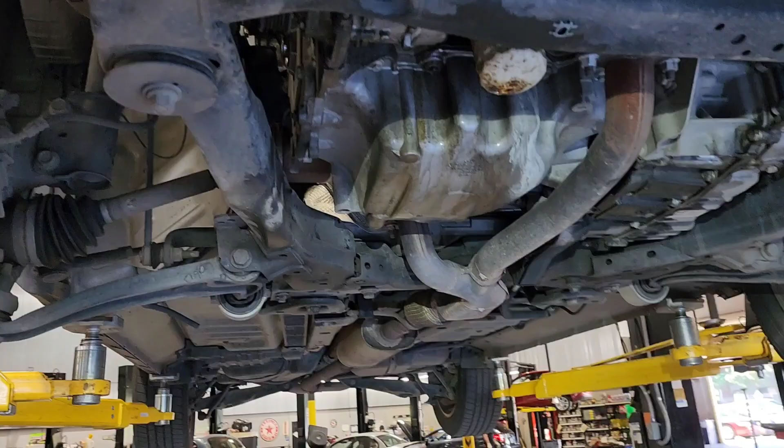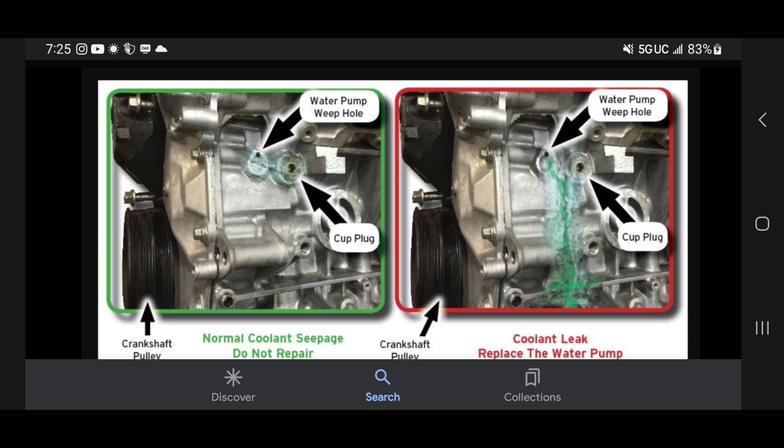So on these 3.5s, how do you know that your water pump is leaking? Well, you'll have coolant leaking right down through here, down the oil pan this way. There's a weep hole in the block up there. I'm not taking the alternator out so I can't really show you, but there is a weep hole right up through there. In the picture on the right, that shows the weep hole. If coolant is coming out of that hole, replace your water pump. That's manufactured through the block, so when the water pump fails, the coolant runs out the block and comes out externally here to show you there's a leak.

The reason it does that is because the water pump itself is inside of the timing cover. If the water pump fails and there was no weep hole, the coolant would just go into the oil. This way you can at least catch it before it completely fails and dumps into the crankcase. Then your timing is messed up, and then you need an engine.

To replace this water pump, we need to remove the timing cover. And to remove the timing cover, we need to lock the cams in place. The cams are under the valve covers. To remove the valve covers, we need to remove the intake plenum. So we're gonna go ahead and get the plenum off, and then I'll show you what we're gonna do for the valve covers. First step is to remove the intake air tube, plenum, and valve covers.

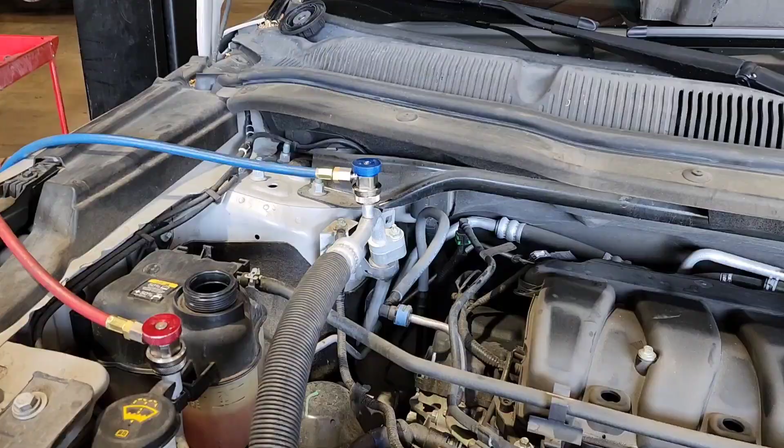I'm disconnecting the AC so I can get these lines out of the way. I can unbolt it here, and I'm gonna unbolt it down there to get this out of the way of the alternator and the timing cover so I'm not fighting it.

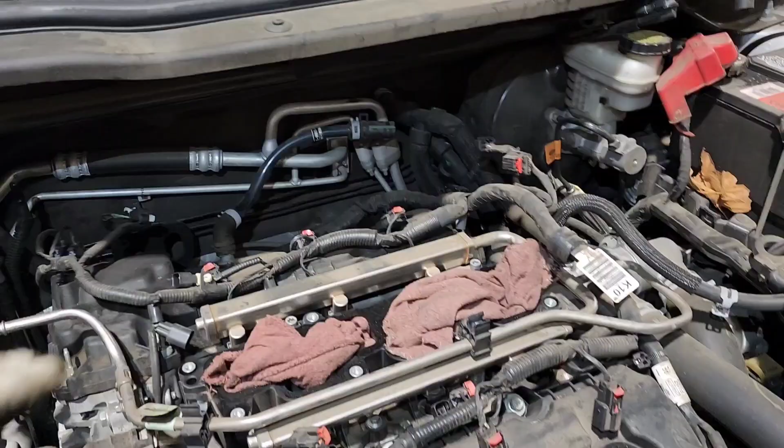The plenum is pretty simple. You're just gonna have a few bolts right here across the middle. This goes in between the plenum and the throttle body. You've got two connectors here, they're gonna come off and just stay there. You've got a connector back here, you got to pop a clip, get that out, and there's one bracket right there with an 8mm. Take those out, and the plenum comes right off. You leave the throttle body connected.

Go ahead and plug up your intake holes here and take an air nozzle, blow all this off the best you can.

From here, you're going to be disconnecting all your coils, popping your coils out. If you turn your coils all the way that way, they'll hit right here and pop up. You got to disconnect all this. We've got a ground here, and a harness over here we got to disconnect, so we got to get that out of the way. You've got your fuel line right there, get that out of the way too. And it's going to be a bunch of connectors.

Then these valve covers are going to be a pain to get off because they're plastic, so you've got a lot of clips holding them in place. Usually these things don't last super long, so hopefully your clips are still good.

So I'm going to finish getting all of this off. You've got a connector here, and here's the connector I was thinking of right here, it comes from the valley and plugs in right there. Got to disconnect that.

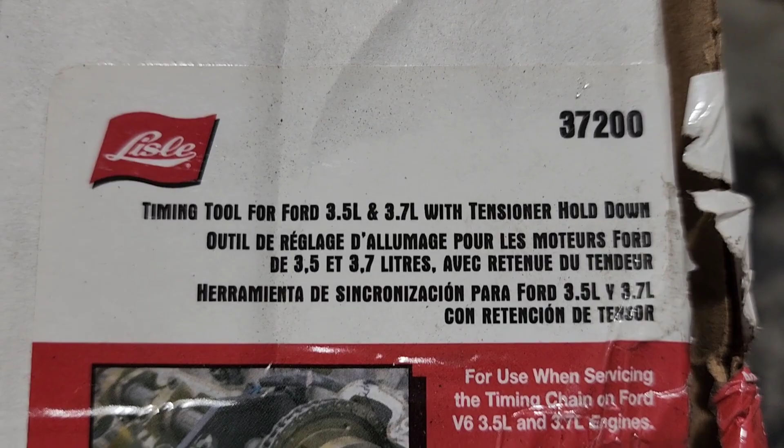So you're going to need a cam holding tool like this. This is from Lisle. This will lock the cams in place and keep them there so the engine timing does not move, and they look like this.

Before you put the cam holding tools in, you've got to take off these oil supply tubes that feed the variable valve timing. Don't forget to put these back on. I put them in the valve cover because on the last one I did, I almost forgot to put them back in the engine.

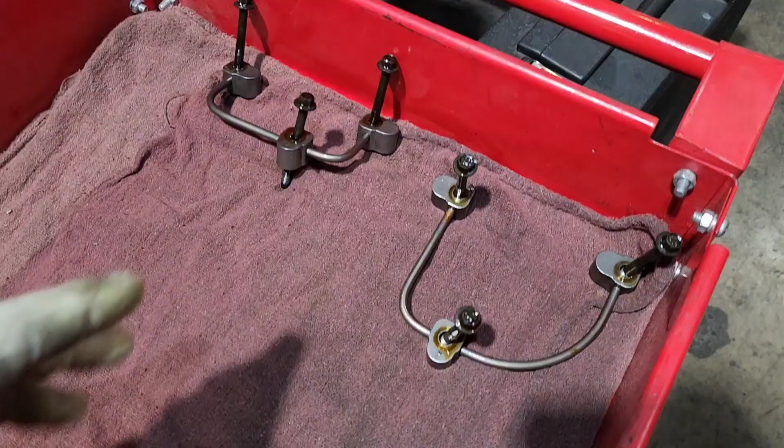You see these oil supply tubes, they're different, so you can't mix them up. The bigger one is for the front head. Now the cam holding tools are going to slip on right there at the front of the cams, and both tools should fit on each head. If they don't slide on both cams, then your timing is incorrect.

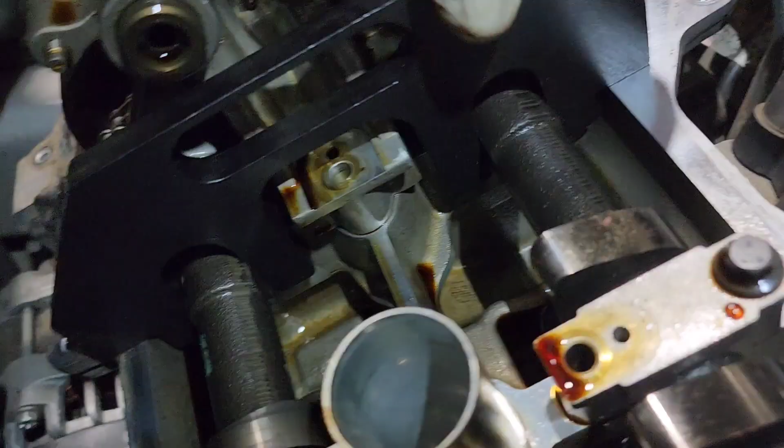Before you lock your cams in, you need to turn your cams over until that dot is aimed up. Both cams have that dot right there. If that's not aimed up, then your engine is 180 off. Turn your timing until the dots are at the top and then lock your cams in place.

You'll be able to see on the back one, the tool doesn't drop all the way down. You're going to see a little bit of a gap right there between the tool and the cylinder head. So that's what I was talking about - it needs to touch the cylinder head. That means the tool hasn't dropped all the way down and the cams aren't completely lined up.

So you're going to see it drop. It just dropped right there. All I did was turn the crank just a little bit, a tiny bit. I just tapped it, and then the tool fell in place. Now you can see both sides of each tool is touching the cylinder head.

When I first set the tools up, the dots weren't at the top. The engine was 180 off. Then when I looked at the timing, saw the dots weren't at the top, rolled it until they were at the top. Okay, so that dot is on the intake cam only. The exhaust cam is only connected to the intake cam by a separate timing chain. So that's the intake cam.

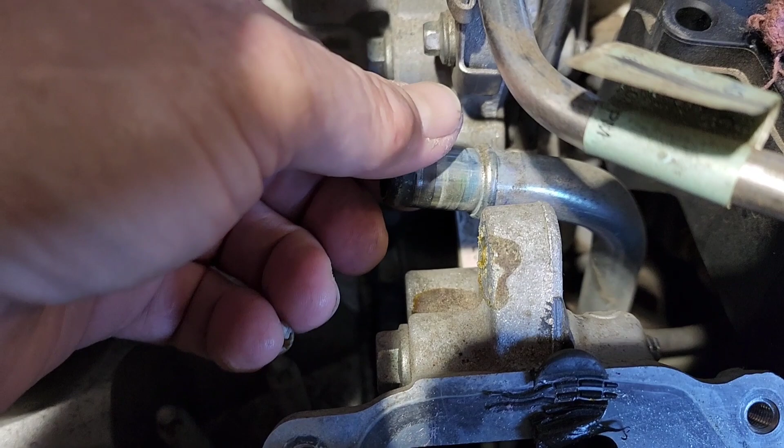Before you can get the motor mount out, you got to take the degas bottle out. You got a hose right here with a quick connect that's going to go here. So what I like to do is, after I release it and pull the hose off, I take the quick connect off of the hard line and I actually put it in the hose. One, it keeps the O-ring and all the internals in place, and two, when it clicks in, you know the bottle is in, the line's in, and it's connected.

So to take the balancer off, I just use a Chrysler balancer remover tool right here like this. I got it set up. Let me see if I can do this one-handed. My tool takes a 24 millimeter. There you go, and it's off.

Looks like this. It's got jaws like this. The centering bolt has a hole in it, and you have different length rods. Use the shortest rod, and it came right out.

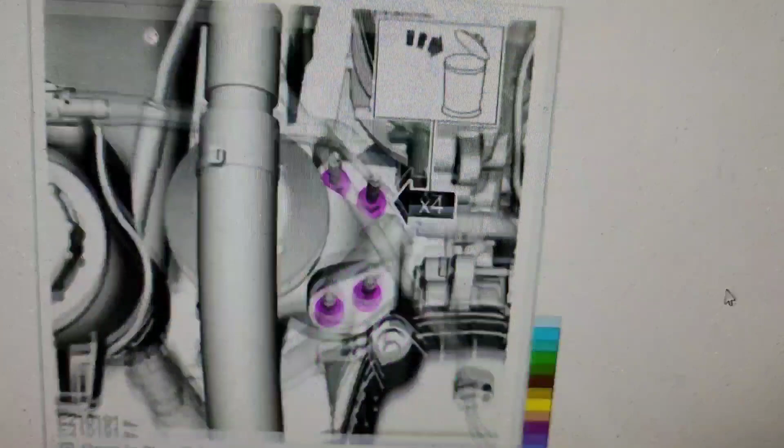The last step before we mess with the tensioner, before the timing cover, is we have to take the tensioner off and then remove the two mounting fasteners to the alternator, and then we're just going to roll the alternator out of the way. We're not going to disconnect it, we're just going to leave it in there. Then I support the oil pan with a jack or a jack stand. And then from there, you got to take the engine mount out.

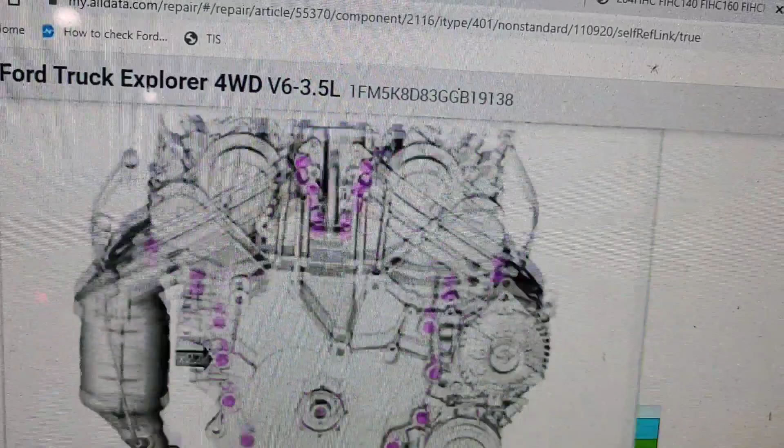Let me show you - this is what the bolts look like for the timing cover. We got to take all those out. So this is why I went ahead and locked the cams in earlier, just so I don't forget - you don't want to mess up and forget. So that is the bolts right there.

So from under the vehicle, you'll see we have the engine mount, we have several big 15 millimeter bolts. There's one there, and there's one there, and another one right in there. So we've got to get this tensioner off and get the generator off, and then what I do is I take out as many bolts in the timing cover as I can from down here. Once I've dropped it down, I don't want to have to climb under the vehicle and take out many bolts.

The main thing is you don't touch those 15s until the engine is sitting on a jack stand or a jack, and you have the engine mount out. Let's go ahead and get this tensioner off and the alternator.

Before you mess with the alternator, go ahead and take the AC line off down there from the compressor. You can get to it right down through here with a long extension, and reach your hand down there to get the line out of the way. I said before you could probably leave it in, and I know people who have done it with it in, but it's easier to just take it out.

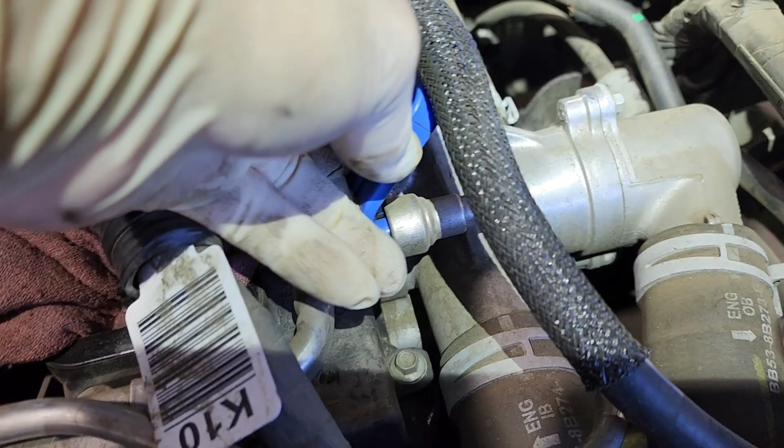Next up, we got to remove this AC line right here. It's going to be an 8 milli, and you're going to use a Lisle Tools AC line disconnect. Pop this line off and cap it.

Then your alternator is just going to maneuver out of the way. You can maneuver the alternator out of the way with the AC line in there. I'm sure you can, but it wasn't worth fighting it, so I went ahead and just took the AC line out.

Oh, don't forget to disconnect your battery. That was obvious, before you go moving your alternator. Always disconnect your battery before you move your alternator.

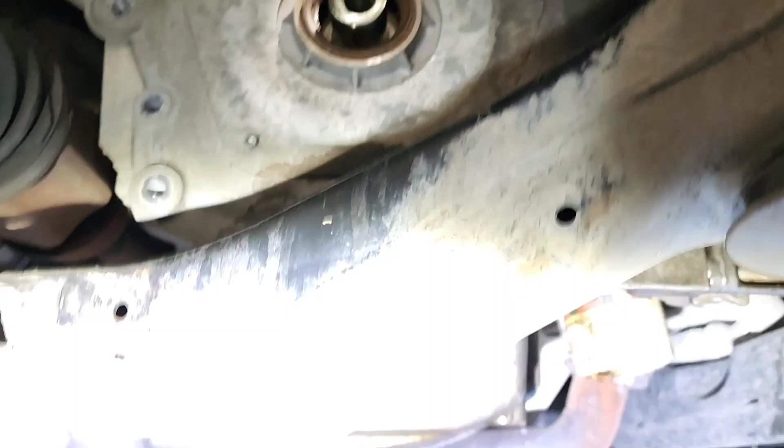With it in the air right here, what you're going to want to do is take out all the perimeter bolts from underneath, all the way up there, all the way around. If you have 16 bolts, you got them all. Now we only have the 3 engine mount bolts and the bolts up top.

I'll show you those. So now that we have all of this off, I'm going to drop it down and support it right here with a block of wood and either a jack or a jack stand, however you want to do it. I like to use a jack stand.

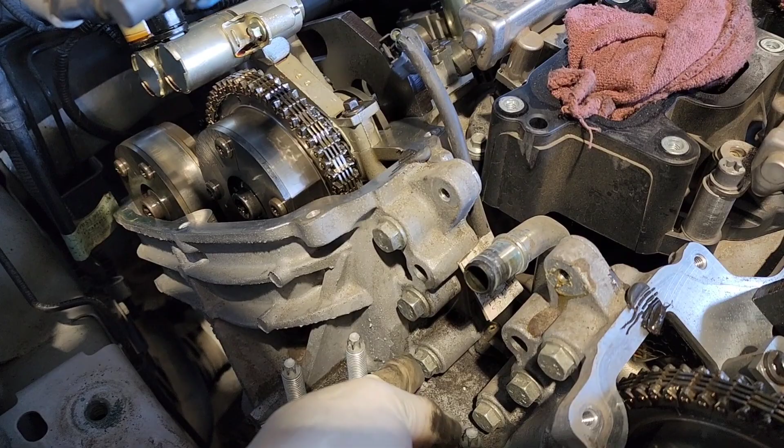Once you've got the engine supported on the jack stand, you're going to go ahead and take this engine mount out right here. Just set that right there for a second. We have 6 more 13mm bolts right here, and then we have the 3 15s that go through here.

Now you're probably going to have to move the engine up and down, or move the car up and down, however you want to do it, to get the bolts out of the cover because they're going to be long, and then we're going to pop this cover off.

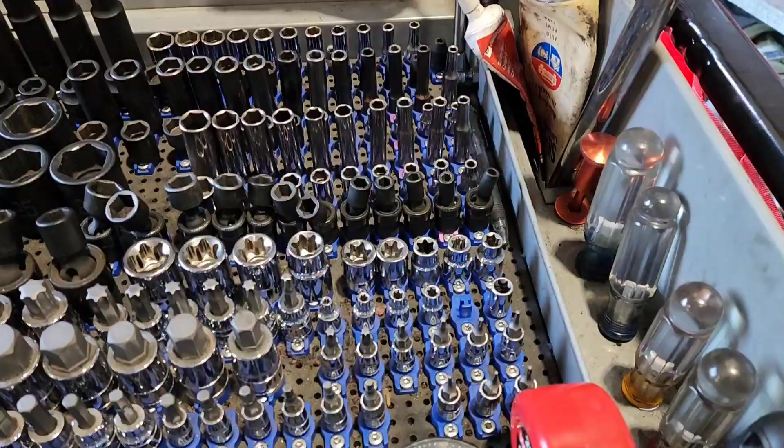You're going to have to come over to your cart right here, and I go over to my Carbine Tools E-Torx section here. I got the E8. You're going to need to remove this stud right here and this stud right here to get these bolts out, because the bolts hit it. You don't need to take out the outside ones, just these 2 here.

And then you can get these bolts out. The 6 bolts at the top of the timing cover are longer. Then you're going to have your 3 15s, and they're going to be different lengths.

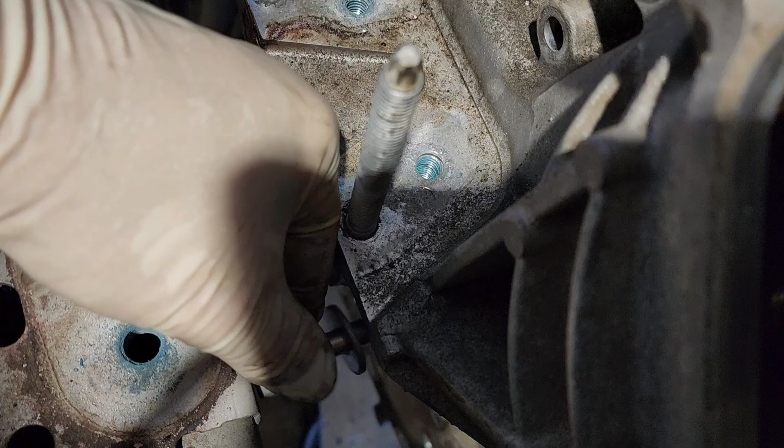These 2 come out the way the engine sits to get the mount out. But this last bolt doesn't come out, it hits. So what we have to do is either drop the car down or raise the engine up so we have clearance to get that bolt out right there.

I almost forgot about this. There's an 8mm bolt at the back of the timing cover. Don't forget to take that out.

So remember, when you pull your timing cover out, you have to be able to put it back in. It's going to have silicone all around the edges. So remember, keep the engine how you had it, and even maybe dry fit your timing cover before you actually try to put it in, because you don't want to bump that silicone and have to do this again.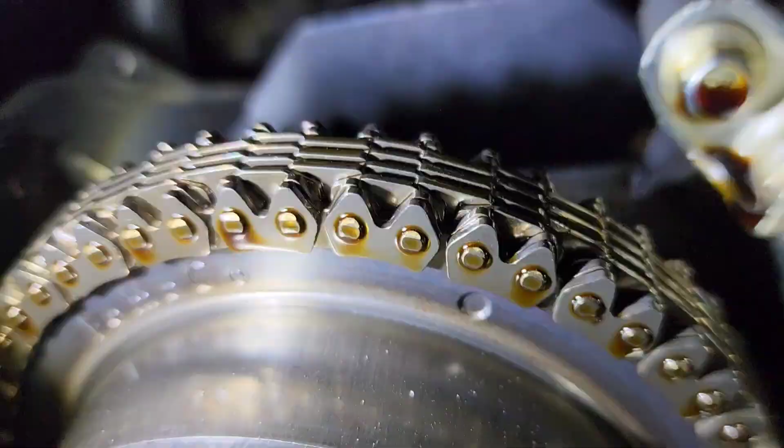So the next thing you're going to do, now that we've got the cover off, you want to come right here. What I do is I just go where this dot is, and I mark the camshaft sprocket and the chain. Do the same thing here, and I do the same thing on the crank.

Your colored links are not going to line up. You only have to do the intake cams, because that's the only one that the chain hooks to. The two cams are held together by a secondary chain. We're not going to be touching that.

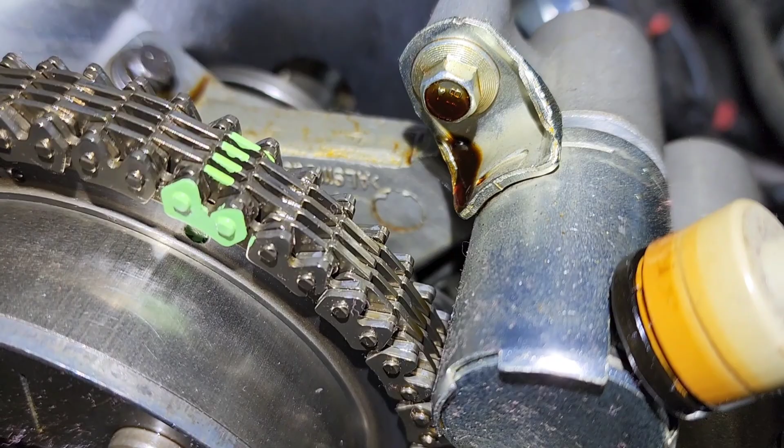So here's what it's going to look like before you take this apart. You're going to mark it like that. Make sure it's very distinct how you mark it. Remember, these timing chains have oil, so sometimes oil drips down.

So here's what we're after right there, that water pump. Yeah, it's timing chain driven inside the timing cover. So you're gonna do the same thing on the crank. What I do when the dot is in the middle, I mark both the links on both sides like that.

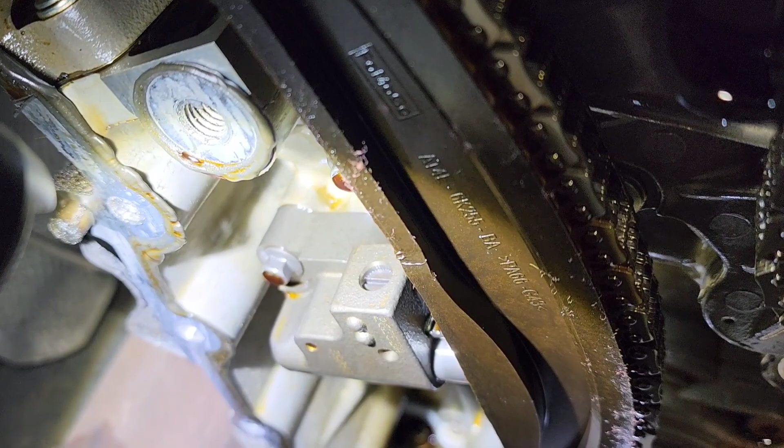We're going to slide this guide out. It's on a pivot right here, and it sits on the tensioner. So you're going to slide this guide out, and then we're going to unbolt this guide right here. So tensioner first, slip the slipper out. You call this one the slipper, and then remove the fixed guide. Well, camshaft solenoids first.

Now I don't take the phasers out, and you can get the chain out with the phasers on. So what you do is, after you have all this off, you slip it off the crank. You just feed the chain this way, and you're able to get it off of the water pump, okay?

And then you're just gonna take this, bring it up like that. All right, we're gonna take out this guide in the front here, and now this guide, the bolt is back here up under, if I can let you see it here. The bolt is way up under there. So I use a wrench, I loosen this bolt up until I can slide this guide out almost up against the sprocket, and then this guide will rotate around like this and allow us—see right here, it's too close to the water pump, you can't get the water pump out. That's why this has to come off.

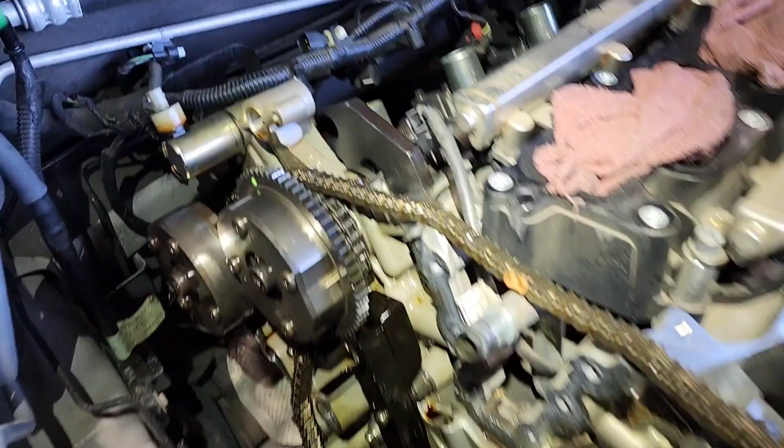To get this out, technically you have to take this phaser out. I don't do that. Now what I do is I come from underneath here with a combination wrench with a box end, and I break it loose. And now with a little ignition wrench like this, you can put it in here and just turn and get this bolt to loosen up. Now, I think that might be enough. We're almost up against the sprocket there.

So now I'm going to pop these 8mm bolts off this water pump. It should be 8 bolts, and I leave the top bolt partially in. So I'm going to try to do this one-handed.

There's a little spot right there to stick a screwdriver in. So you stick the screwdriver in and you break it loose. I'm trying to hold the camera, hold the screwdriver, break it loose. It's not going to work, but you just want to make sure you have all your bolts out and just go around, break it loose, and then make sure that guide is all the way up against the phaser.

Just to show you, you can take this water pump out without taking the guide out. You can see I have the guide up against the sprocket, and I'm going to rotate the water pump out with the guide in place.

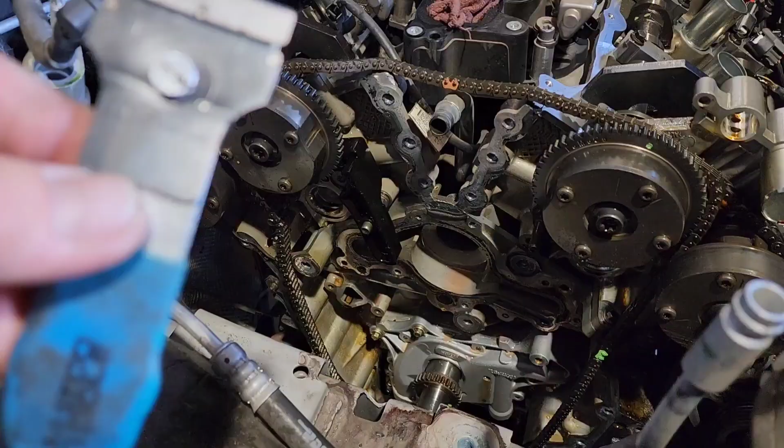Next step is to clean all the silicone off and clean the water pump surface. I like to use a little razor blade scraper like this. It's from Matco, pretty cheap. And then you're going to get little squares of Scotch-Brite pad. Just keep it soaked in brake clean, and as long as it's soaked in brake clean, it'll clean great.

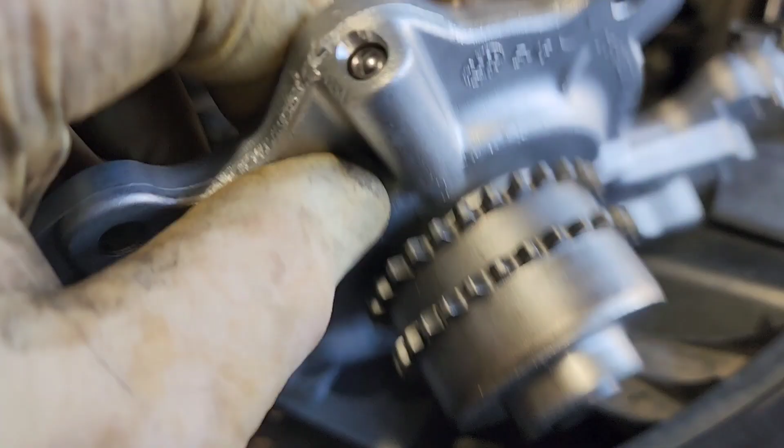So this is what the weep hole would look like if you had an external water pump. It would come out to like a little plug, and when coolant came out, you know that it had failed. Well, since this one's inside the timing cover, there is your weep hole. So when your water pump fails, it pushes coolant out of that hole, which then pushes coolant out of that hole right there in between those 2 bolt holes. It pushes it out of there, and then it comes out of the block. And that's how you know it failed.

And like I said before, this is how internal water pumps are if you have one inside of your timing cover.

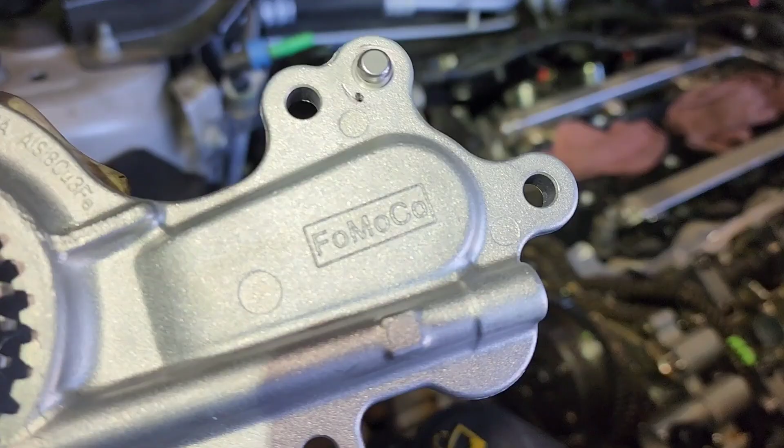So once you get everything cleaned up, I take the bottom of the chain and wrap it up here along the top just to get it out of the way. So you're going to put your water pump on and torque it to 89 inch-pounds plus 45 degrees. So here's what we'll be putting in, a Ford Motor Company water pump. If you're putting in a Ford one, it will already have the gasket pressed in place.

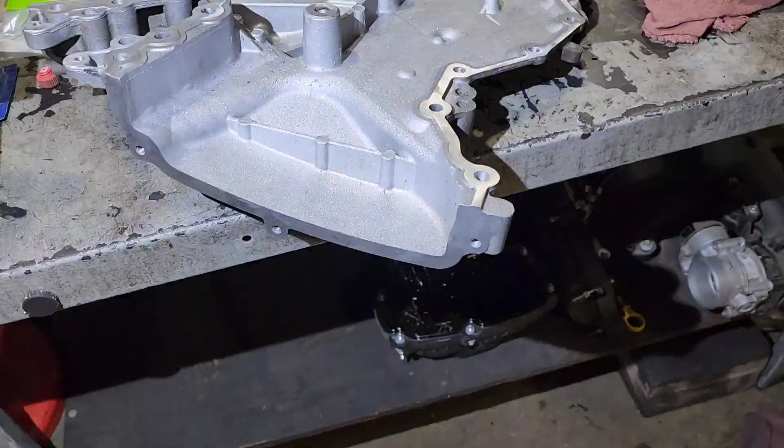While you're waiting, go ahead and get your timing cover clean so it has time to sit. Just spray it off, get everything clean. Got the new crank seal installed here. Don't forget to clean your bolt surfaces there.

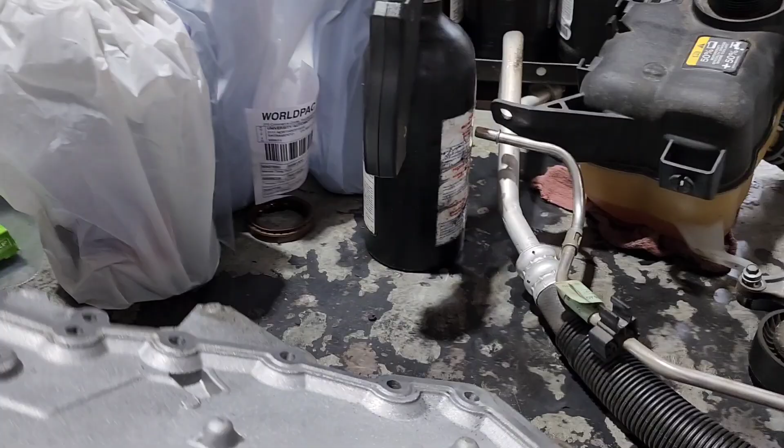From here, we're going to go ahead and lay the chain back down, put it kind of underneath the pipe, get it all back strung. Then we're gonna reconnect this guide, then put the guide on the other side. Get both of those guides in.

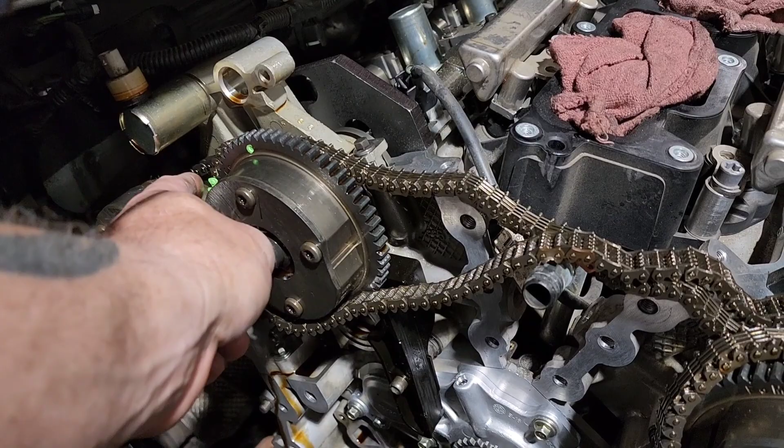You're going to go ahead and get all your timing marks lined up. Get that one set right there, get that one set right there, and get it lined up on the crank. Once all of your marks are in place and the chain is strung, we're going to go ahead and bolt up the fixed guide on the front.

Now with your timing marks all lined up and your cams locked in, your timing chain and your cams should not move. Once you have all that done, you're going to slide the slipper in. Once you've got the front guide bolted in and your slipper slipped on and your timing is all correct, we need to bolt the tensioner in. But before we bolt the tensioner in, you have to depress it and get it locked in place if you're not replacing it.

Now, before you run your chain, what I like to do is clean all of the sealing surfaces for the timing cover while the chain is out of the way so I have more room. When you go to clean this, you're going to have two areas on the back. Right there is going to be a little puddle of oil, you want to sop that up so it doesn't keep running out. Then there's the section right above it, below the exhaust cam sprocket, so you want to clean that out too, since it'll just keep running down the timing cover.

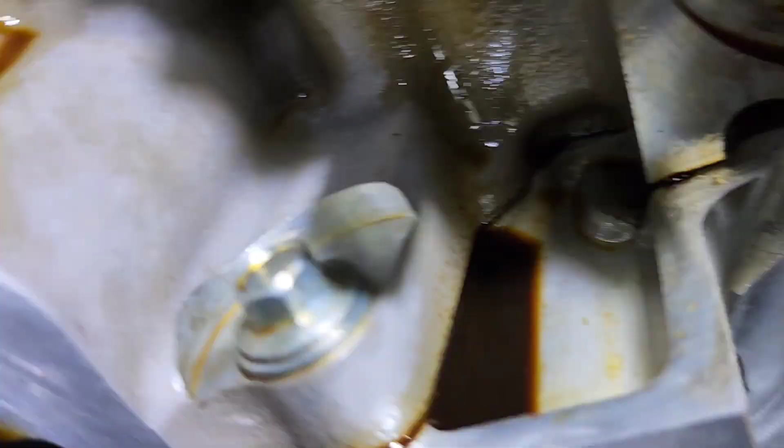Now I like to stick a rag up in there until I'm ready to put the timing cover in, so it soaks up all the oil. And then this section right here by the head gasket, that's just going to keep leaking out oil and cause problems.

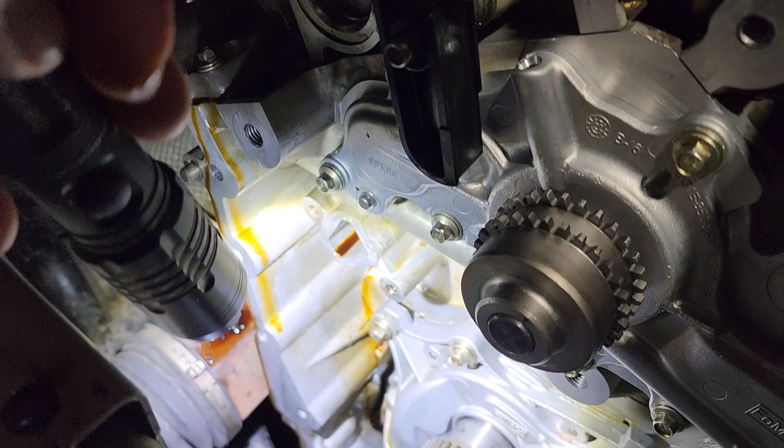Now, whenever you get ready to run your silicone, there's a seam at the head gasket to block, and then there's a seam where the oil pan meets the block. You want to put a dab of silicone on each of those four points before you put the timing cover on.

So I had this happen to me, and someone asked me about it doing this job. What happened is they had this timing mark lined up, but it was halfway to the tooth, and they didn't know what to do because the cams were locked in. Everything should be like it is, well, the cams are locked in, but there is a slight amount of movement.

So what I did was, on this one here, the mark was here on my chain. So all I did was take a wrench right here and move this cam that way while pushing down on the chain, and then the chain dropped in place.

Now you'll notice that down below, that mark is not going to line up down there. Remember, we have to put this guide in here, and then our marks will line up down below. So now that I've got the chain on the top, and it's on the sprocket, below the sprocket, we need to put this guide in. Actually, put this guide in first, don't forget this guide.

As you can see right here, the crank is off slightly, it's turned clockwise just a little bit. So what we're gonna do is grab the crank and turn it back until the teeth line up with the mark.

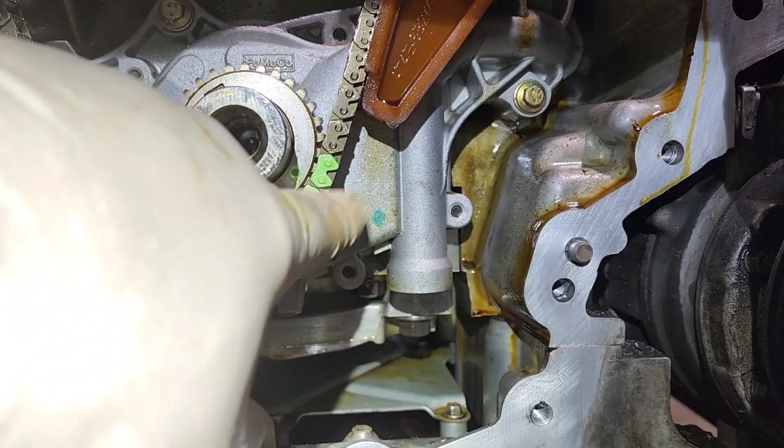Because we're a half a tooth off right now, just moving the crank will line up the chain. The top chains are lined up with the mark, so now we have to get this lined up so we can get the tensioner in. This fixed guide is 89 inch-pounds. All I did was grab the crank with some pliers and turn it back just a tiny bit, and the chain dropped right onto the sprocket.

So we got to put the slipper in here. I'm going to try to do this one-handed. It's going to be pretty hard because the chain has to lift up and go on top of the slipper, but I'm going to try. There it is, it just slipped in one-handed. And the slipper just pushes forward. The tensioner is behind it, keeping all the slack out of the timing chain.

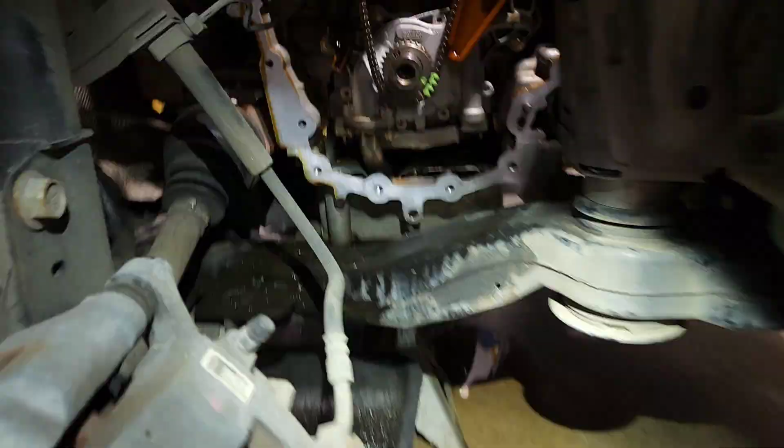Now we're going to look from underneath. We're going to push the slipper up like the tensioner. Look at that, timing is dead on.

So the way that you get this tensioner ready, the long shaft at the bottom is the actual tensioner. The top plastic piece keeps the tensioner pushed in so you can install it. You can see the teeth in the top of that plastic rod. Those teeth push up against something inside of the tensioner, which keeps it locked in place.

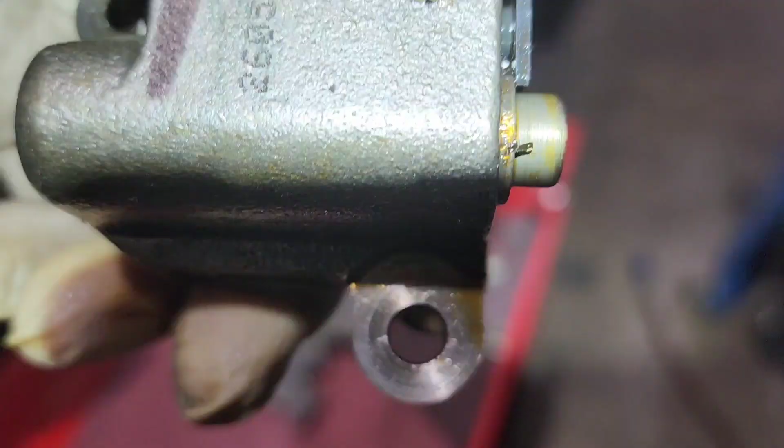Once you get it all the way depressed, you push the pin in. This is just a timing belt tensioner pin because I don't have one for this specific one. So all you're going to do is depress the vise and then pop the little piece inside, and allow that plastic mechanism to keep going up and up and up. You can see it right there. Once you have it all the way in, the pin should go in that back hole, and then you should be able to take it out of the vise, and now it's ready to install in the engine.

Gonna sit right inside the slipper. This tensioner is 89 inch-pounds as well. We're gonna torque that, and now the tensioner's torqued.

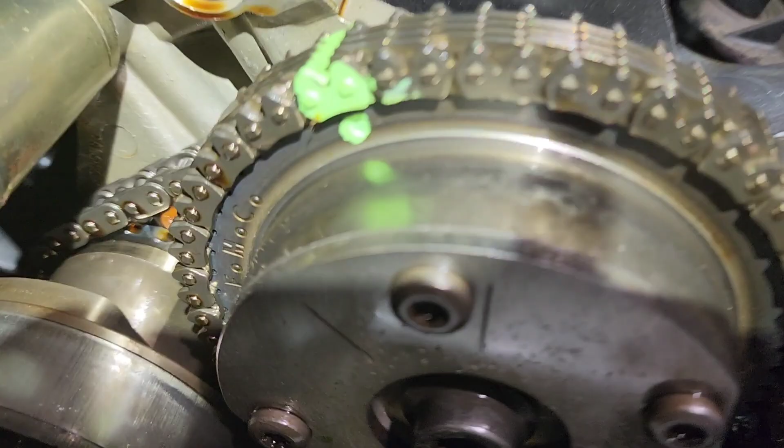Just like any timing system, before you pull the pin on the tensioner, you want to double check your timing one last time. That one right there, dead on. We're going to go to the front, dead on. Now the bottom, you got to be careful because there's also slack in the chain until the tensioner is pulled. So right there, you can see the dot is in the middle of the two links I marked. Now you want to just keep the slack up on the chain while we pull the pin on the tensioner. Timing is locked in place now.

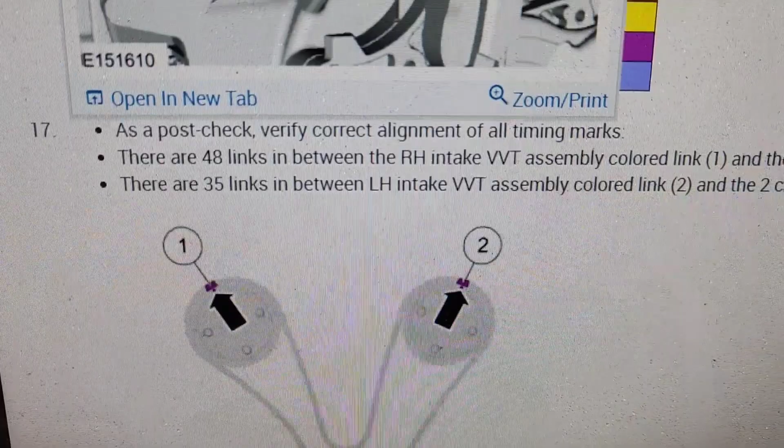So if you want to be certain, you can do it this way. There are 48 links in between the right hand intake VVT assembly mark or link and the left hand colored link. The ones we marked would be the same thing. And then there's 35 links between the left hand intake assembly colored link to the two crankshaft sprocket colored links. You can see that in the picture, there's the two colored links at the top and the two that we made at the bottom.

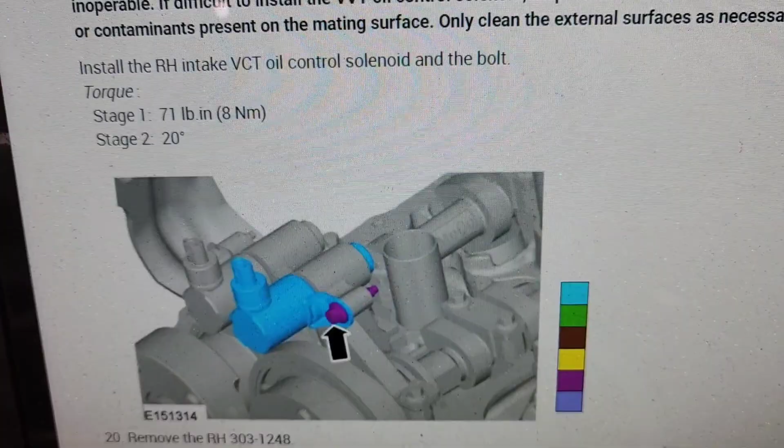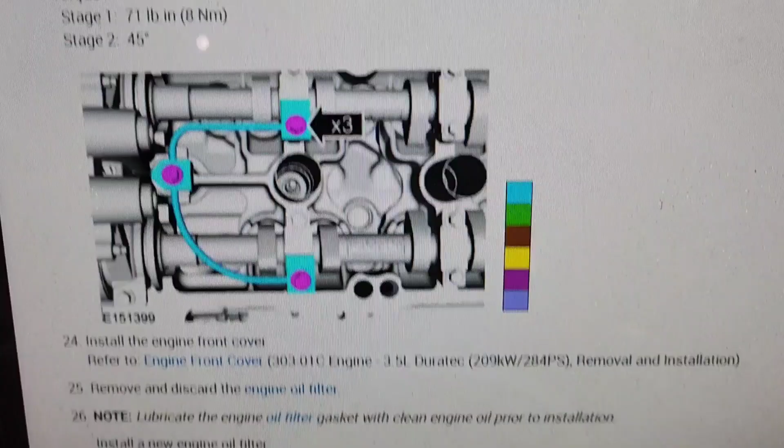Now I'm just going to go through this. The VVT solenoids are 71 inch-pounds plus 20 degrees. That's for both intake cam solenoids on both front and rear. Then you're going to remove the special tools. You're going to install the rails, and they are 71 inch-pounds plus 45 degrees on both of them. That's the oil supply tubes inside the valve cover. Once you've got all that torqued, we're ready to start reassembling the engine.

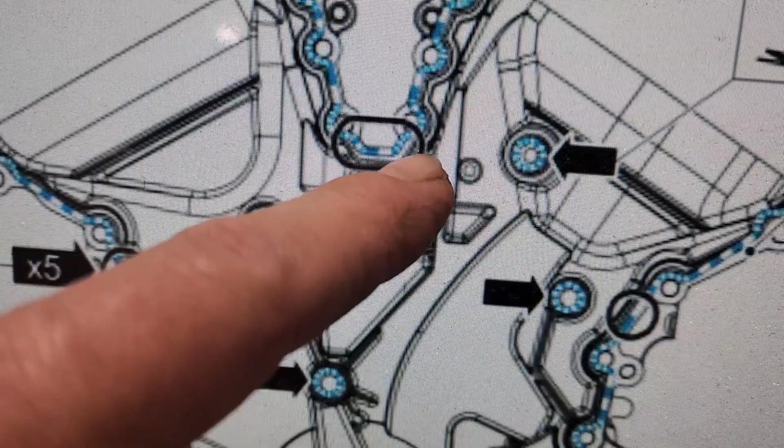So once you've got all that, now we're ready to put silicone on the timing cover. Now, that's right there, you can pause it and really look. You're going to go around the inside of the timing cover on the inside of all the bolt holes, all the way around the perimeter. And you can see those circles are where they're showing you to add the globs of silicone for the seams in the block and the head gasket. And then you want to make sure that you do the inside bolt holes for the 8mm and the 15mm.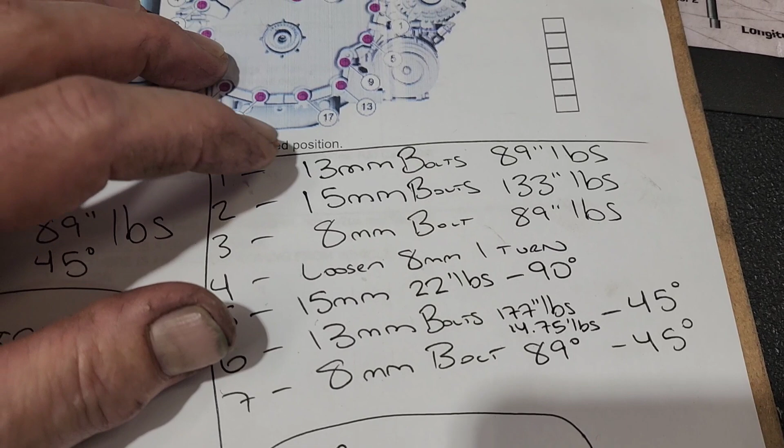Now here's the torque specs written out easily. The 13mm bolts you're going to torque to 89 inch-pounds. Then you're going to torque the 15mm bolts to 133 inch-pounds. The 8mm bolt, you're going to torque it to 89 inch-pounds and then loosen it one turn.

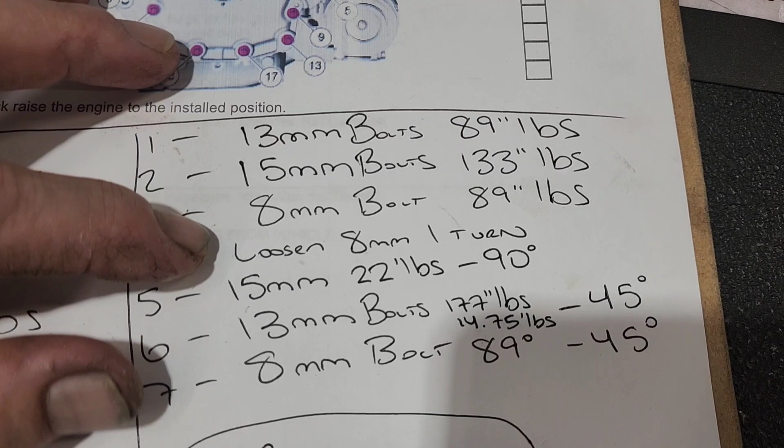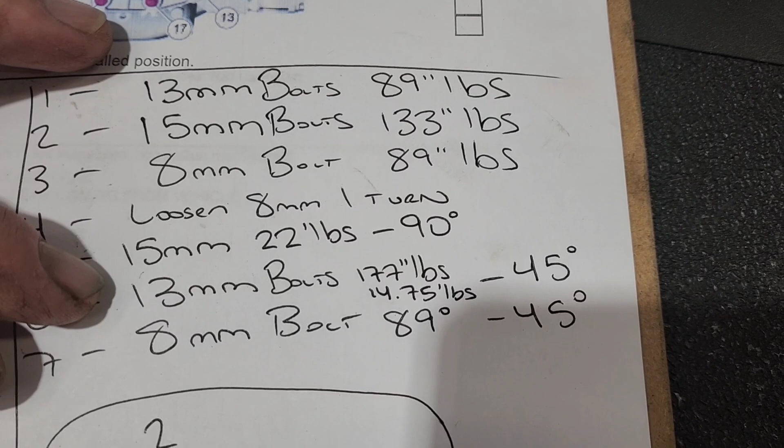Then you're going to do the 15mm bolts to 22 foot-pounds plus 90 degrees. The 13mm bolts to 177 inch-pounds or 14.75 foot-pounds, then 45 degrees. And then the last torque is the 8mm bolt back to 89 inch-pounds, and then 45 degrees. That's supposed to be an inch-pound symbol. And then 45 degrees, and the timing cover is torqued.

Now the rest of the torque specs. Where your timing cover and your cylinder head meet, right there and on the other side, you're going to have 2 per valve cover. You're going to put a dab of silicone. Then the valve covers are going to be 89 inch-pounds.

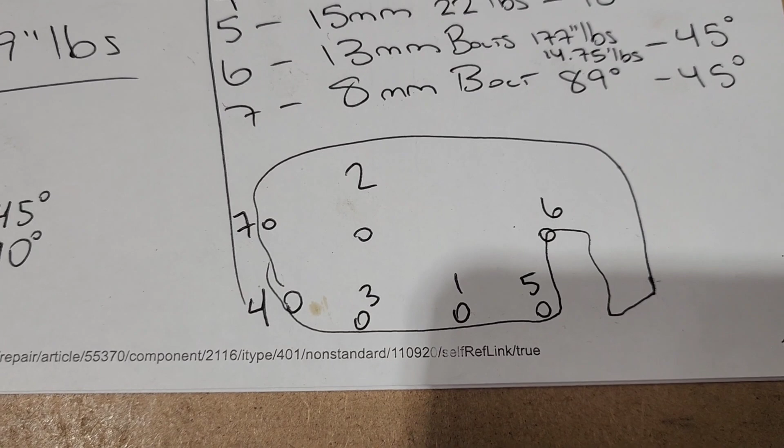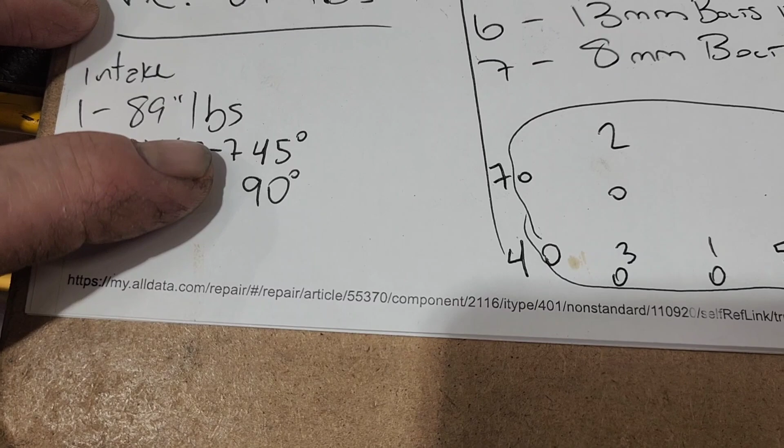Your intake is going to be 89 inch-pounds, and then you're going to torque bolt 1 and 3 through 7 to 45 degrees. And then you're going to torque bolt 2 to 90 degrees. These are all 89 inch-pounds, and then the degrees is different. So you're going to torque all of them to 45 degrees except for number 2, and then 90 degrees for number 2. Number 2 is going to be the long bolt. Once you got that, then your plenum is torqued. Good to go.

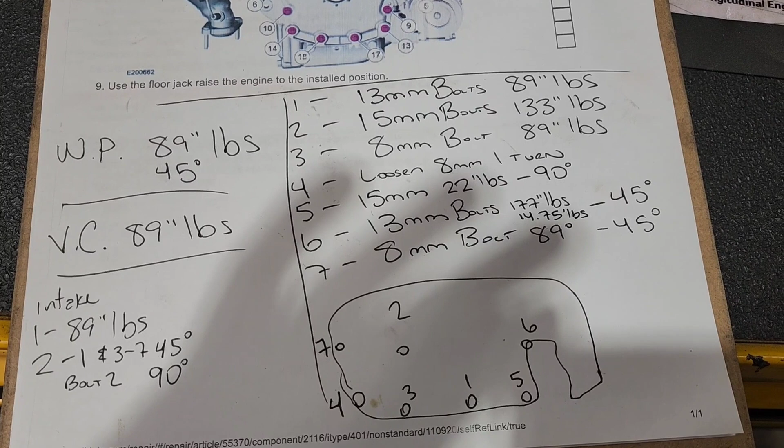So the 2 parts right below the exhaust cam sprocket on the front and the rear, the way that the engine's designed is oil just pools up there and it just slowly trickles down. So what I do is I put rags in there, I stuff rags in there, I wipe down the phasers, I get everything on the front all clean and dry, no oil.

Then I get my timing cover ready. I put my dabs of silicone on the seams where the head meets the block and the upper oil pan meets the block. Then I pull the rags out, and then I'll slide the timing cover in and stab it.

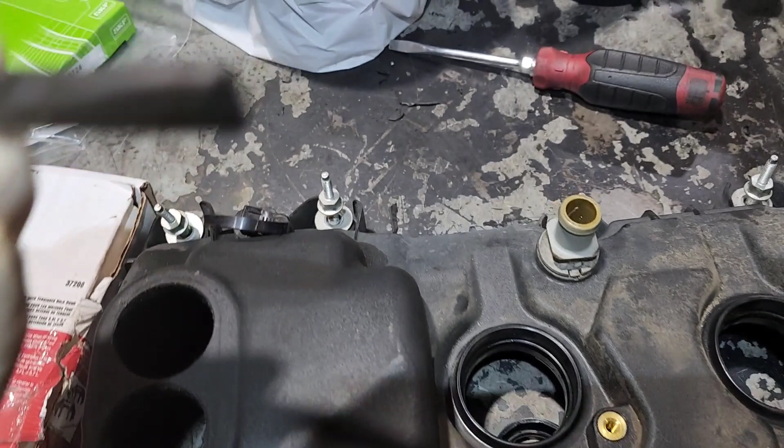Now, the most nerve-wracking part of any time you do a timing cover is getting it back in without touching anything and it's sealing. So you're going to lay your valve cover like this and use a tool like this and just kind of go around and knock all the seals out.

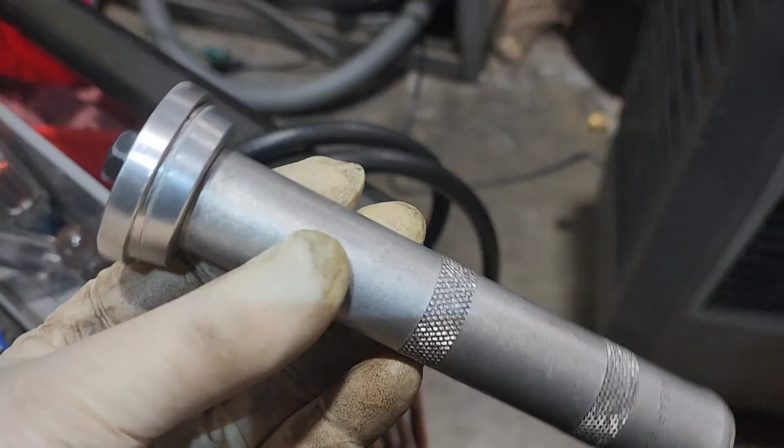And they're going to go in from the inside. I found the best way to put these seals in is a seal driver like this and lube up the seals. Lube them up real good with Sil-Glyde, because remember, you're hammering them into a plastic valve cover.

And what I like to do is, for these gaskets like this, I like to get it all started, and I take a small little rubber hammer like this and I just tap the gasket all the way around so it doesn't fall out when I'm putting it in.

So the best thing to do right here, once your timing cover has seated and your silicone is dried, if you take a razor knife, a razor blade, and just cut along here, it'll cut it nice and smooth. And this is where you're going to put silicone, here and here. And just lube up your seals for your solenoids and for your spark plug tubes, and it'll go on easier.

So once you get your valve cover, you want to make sure that you tighten it like this, because you don't want it to pull down one side and not the other and crack the valve cover, install it wrong. You got these, goes around here, you got seals here, you got two spark plug tube seals. So 89 inch-pounds, don't forget the valve cover.

And then I would probably go ahead and get your alternator back in place before you start messing with the wiring, because the wiring is going to be tight once you put this all in place, and your alternator is going to have a hard time getting in place.

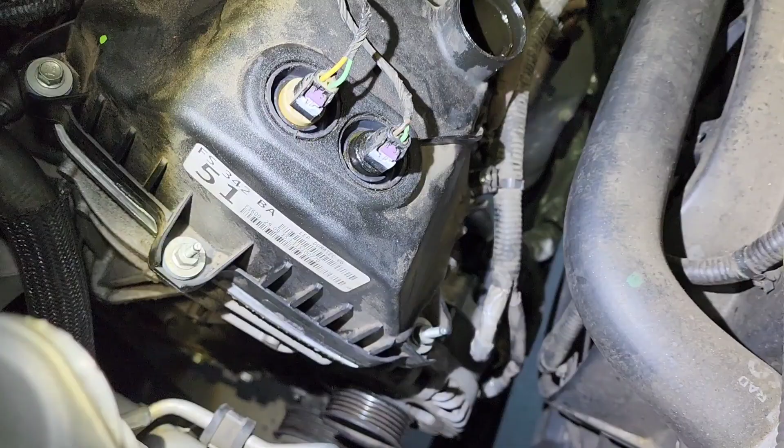So when you put your degas bottle in, lube up your nipple there where this slides onto so the seal doesn't tear. You can go ahead and get all this in, and then once we get this in, we're going to slip the AC line around there, but get new seals for your AC line. I also recommend that you replace your Schrader valves while you're at it.

Get your gasket ready here. I'm going to go ahead and put this in, but don't forget that it has to go between the throttle body and the intake. So it kind of finagles in there so it doesn't just set right in.

Once you get that in, go ahead and we're going to run the coolant hose over. Got the AC line connected. Then once we get the intake on, don't forget your purge line. It goes from there up to the intake.

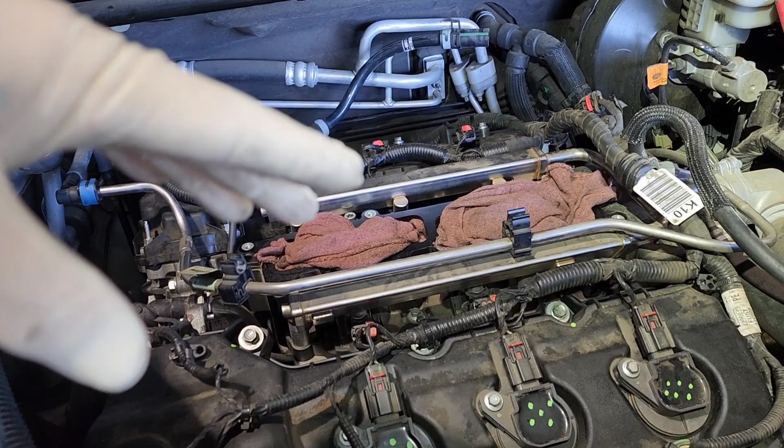I'm going to lift it up, put the drive belt on, clean it off, drain the oil one more time. That way any coolant that got in there, you drain out. Fresh oil, fresh coolant, should be good to go.